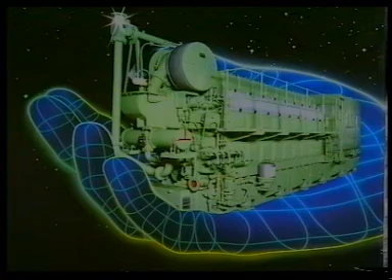This video shows how to dismount and mount the cylinder head, piston and cylinder liner. With regard to overhauling of the components, please refer to the relevant instruction book or the overhaul video.

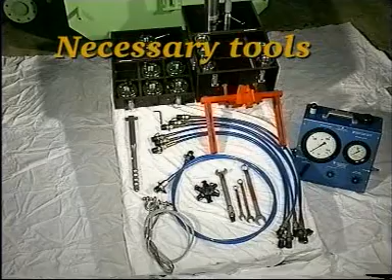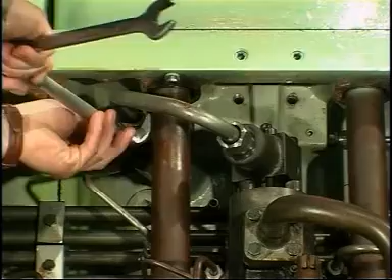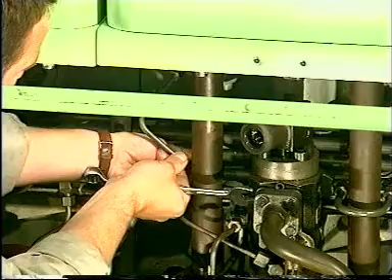Remove the rocker arm top cover and the covers giving access to the injection pump. Disconnect the fuel oil high pressure pipe. Disconnect the rocker arm lubricating pipes. Loosen and remove the cooling water outlet pipe.

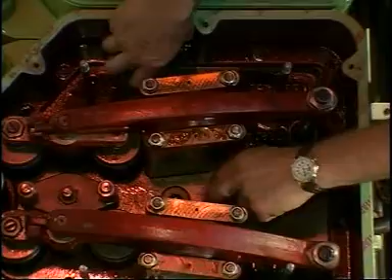Remove the exhaust pipe flange screws. Remove the protective caps from the cylinder head studs. Clean the threads and grease with Molykote or a similar product. Mount the extension tools and grease the threads.

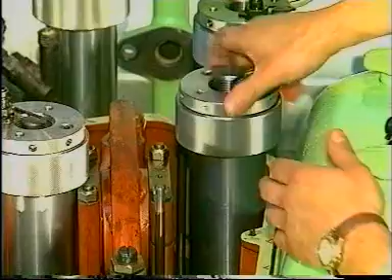Mount the spacers in such a way that the Tommy bar can be applied through the slots when the nuts are to be loosened. Mount the hydraulic jacks and screw them firmly against the spacers. Make sure that the parts engage correctly. Unscrew the jacks 3/4 to 1 revolution to provide for the contraction of the studs.

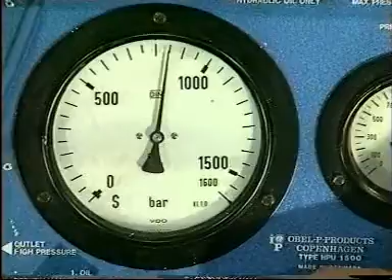Connect the snap-on couplings to the distributor and to the jacks, and connect the high pressure pump to the distributor. Vent the system if necessary and increase the oil pressure to the prescribed value. Unscrew the nuts with the Tommy bar. Be careful not to screw the nuts up against the jack. Relieve the system of pressure and screw down the nuts so that the oil returns to the pump. Disconnect the hydraulic pump and remove the hydraulic tools.

Remove the cylinder head nuts. Place the lifting tool on the cylinder head and fasten it by means of the 2 screws. Attach the hook to the lifting tool and lift the cylinder head away.

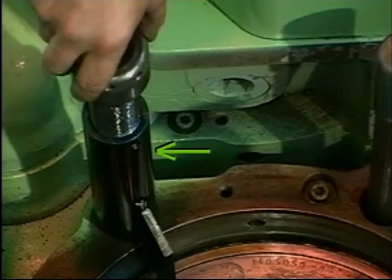Turn the piston downwards and clean the upper part of the liner. Place a used piston ring on the top of the piston. Mount the tool for holding down the cylinder liner. Turn the piston upwards and push the flame ring out of the liner. Remove the flame ring and the piston ring. Clean the upper part of the liner.

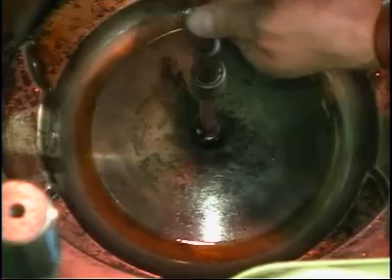Turn the crank throw concerned to a position approximately 50 degrees before top dead center. Clean the threaded hole in the top of the piston. Mount the tool for holding down the cylinder liner. Mount the lifting eye bolt, hook on a tackle and haul tight. Remove the cover giving access to the crankcase compartment. The big end bearing may be designed for mechanical assembling or hydraulic assembling.

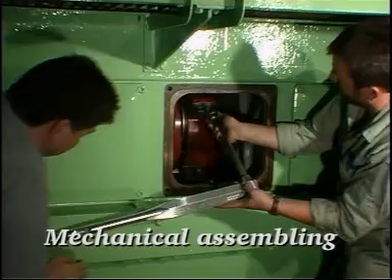Loosen the connecting rod screws and remove one of the uppermost screws. Mount the guide pin and insert a screwdriver or the like into the guide pin hole. Unscrew the remaining screws and remove the bearing cap. Remove the guide pin.

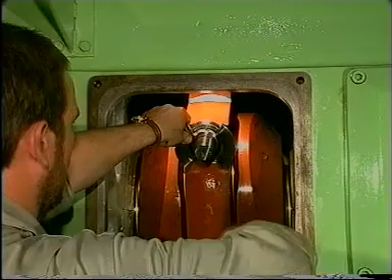Clean the threads and grease with Molykote or a similar product. Mount the spacer rings and the hydraulic jacks, positioning the slots of the spacer rings so that the Tommy bar can be applied through them when the nuts are to be loosened. Make sure that the parts engage correctly. Unscrew the jacks 3/4 to 1 revolution to allow for the contraction of the studs. Vent the system if necessary and increase the oil pressure to the prescribed value.

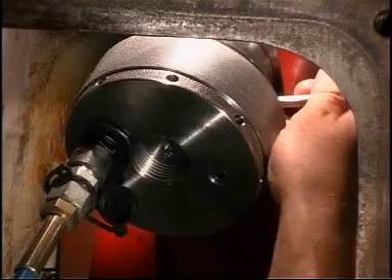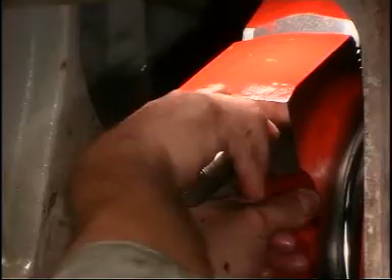Unscrew the nuts with the Tommy bar. Relieve the system of pressure and remove the hydraulic tools. Unscrew the nuts and remove the bearing cap. Finally, unscrew the studs.

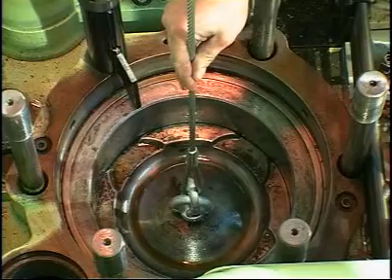Push the connecting rod clear of the crank journal and lift the piston and connecting rod. Remove the upper big end bearing shell and lift the piston out of the engine. Land the piston on wooden planks and mount the bearing cap so as to protect the joint faces.

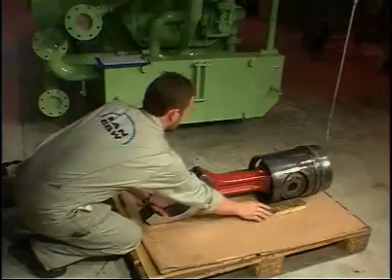Insert wooden wedges and lift the piston. Remove the Seeger circlip and piston pin and lift away the connecting rod.

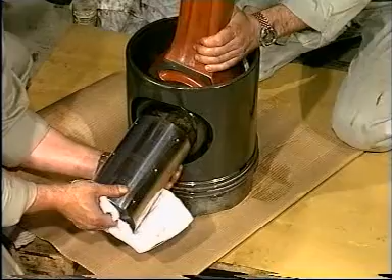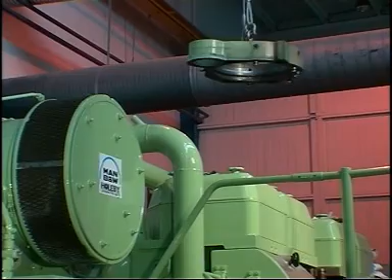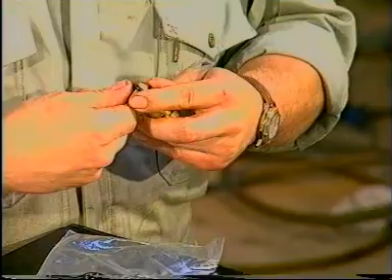Remove the tool which holds down the cylinder liner. Loosen and remove the screws which secure the cooling jacket to the engine frame. Lift the cooling jacket off the engine and remove the cooling water connections. Discard the old O-rings and mount new ones. Clean the sealing surfaces with emery cloth and cleaning fluid. Discard the O-rings from the scavenge air sleeve and mount new ones.

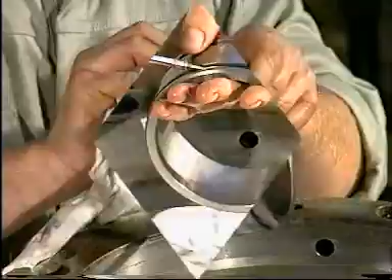Remove and discard the O-ring on the underside of the cooling jacket. Lower the lifting tool into the cylinder liner. To ensure the correct remounting, make sure that matching marks have been made on the liner and on the frame. When the lower crosspiece is in place, tighten the tool until it abuts against the cylinder liner.

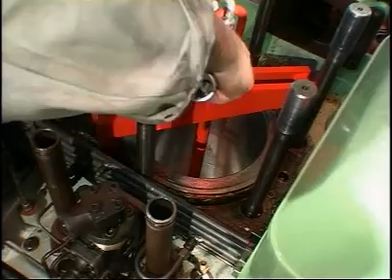It is recommended that the crankshaft be protected by plastic, as 2 to 3 litres of water will drain off when the first liner is removed. Lift the cylinder liner out of the engine. Use a chisel and a hammer to loosen the sealing ring.

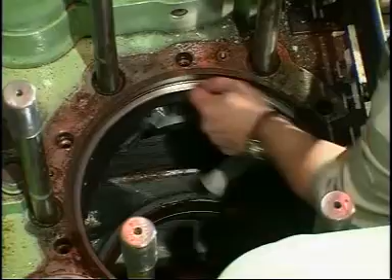Clean the sealing surfaces with emery cloth and cleaning fluid. Clean and check the condition of the wear ring in the bottom of the frame. If necessary, exchange the wear ring. Finally, remount the sealing ring between liner and frame, or, if necessary, mount a new ring.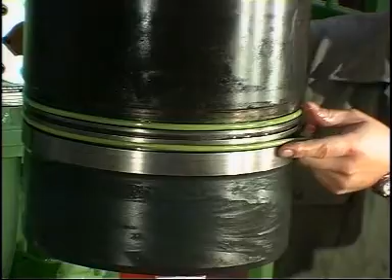Mount the lifting tool in the new or overhauled cylinder liner. Lift the liner and clean the O-ring grooves. Lubricate the new O-rings with oil and mount them in the grooves of the liner. Lower the liner carefully into the engine frame.

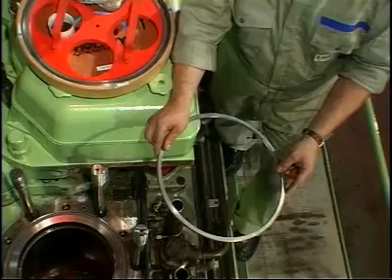When the first O-ring touches the sealing face, align the liner so that the scratch mark on the liner flange is in line with the scratch mark on the frame. When the liner has been lowered fully home into the frame, remove the lifting tool. Fit a new sealing ring in the groove on the top of the liner. Measure and record the distance y.

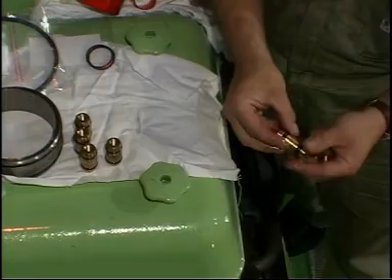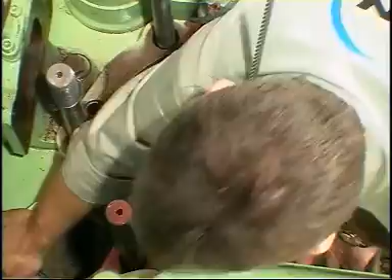Lubricate the cooling water connections with oil and mount them in the engine frame. Mount a new O-ring in the groove on the underside of the cooling jacket. Mount the cooling jacket and tighten it to the cylinder frame by means of the Allen screws. Mount new O-rings on the protecting tubes for the push rods.

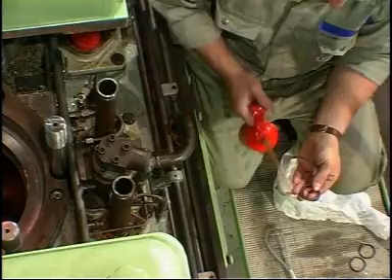Lubricate the scavenge air sleeve with oil and mount it in the cooling jacket. Finally, mount the push rods. Place the piston upside down and lower the connecting rod into the piston. Make sure that the ST marking on the piston crown points in the same direction as the bearing cap.

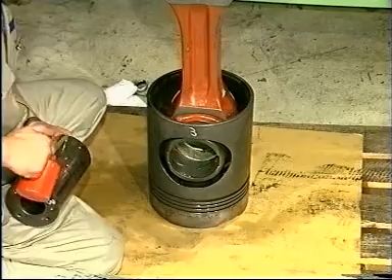Lubricate the piston, connecting rod and piston pin with oil and insert the piston pin. Mount the Seeger circlip and ensure that it engages correctly in the groove. Insert wooden wedges, tilt the piston and mount the lifting eye bolt.

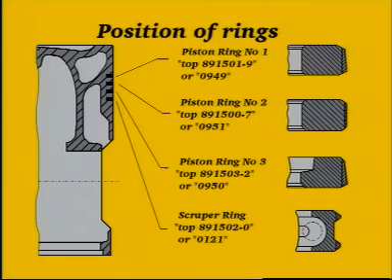Always use new piston rings and a new scraper ring. Fit the rings in accordance with the markings shown on this sketch. Assemble the coil spring in the lowermost groove. Assemble all rings so that the numbers face upwards. Fit the scraper ring so that the ring joint and spring joint are offset approximately 180 degrees.

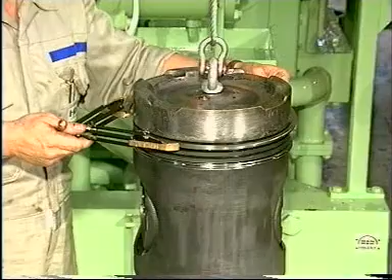Use the special piston ring opener when fitting the piston rings. The piston rings may be permanently distorted if the ring opener is not used. Check that the rings can move freely in the grooves. Ascertain correct assembling by checking that the face of the rings can be pressed inside the groove edge.

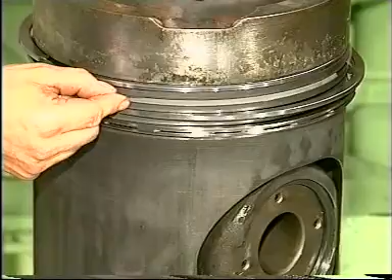To confirm the vertical clearance, insert a feeler gauge of adequate thickness and move it all the way round. Finally, offset all the ring joints approximately 180 degrees to prevent gas leakage. Remove the bearing cap from the connecting rod. Mount the guide ring on top of the cylinder liner.

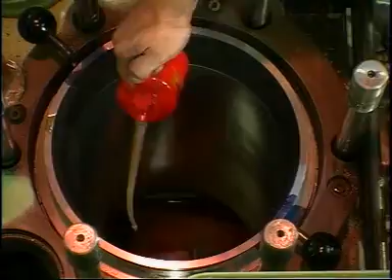The guide ring for liners with a flame ring is provided with a protrusion. Lubricate the guide ring with oil in order to minimize the friction. Clean the connecting rod and joint faces and mount the upper bearing shell. The correct free spread will ensure that the shell will remain in position.

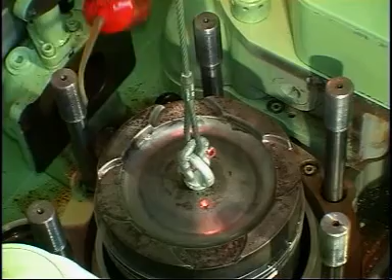Lubricate the piston, piston rings and scraper rings, and lower the assembly into the cylinder liner. Make sure that the crank throw is in a position of approximately 50 degrees before top dead center. Clean and lubricate the crank journal with oil. Land the connecting rod on the crank journal, taking care not to damage the journal and bearing shell.

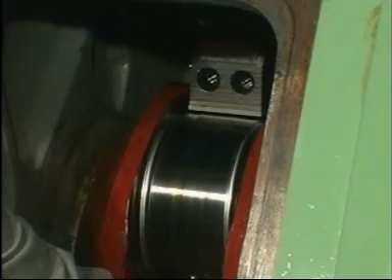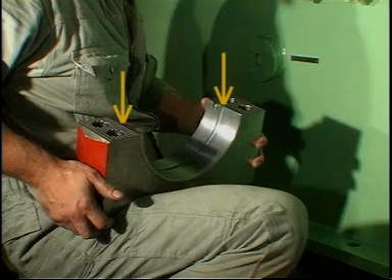The big end bearing may be designed for mechanical or hydraulic assembling. Insert the guide pin. Mount the bearing shell in the bearing cap and coat the joint faces with Molykote or a similar product. Mount the bearing cap and insert a screwdriver in the guide pin hole. Lubricate and mount the screws and remove the lifting tool from the piston.

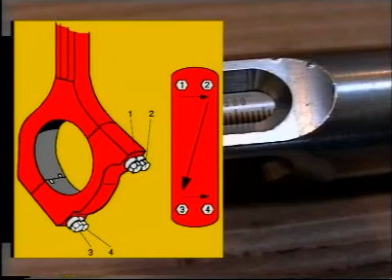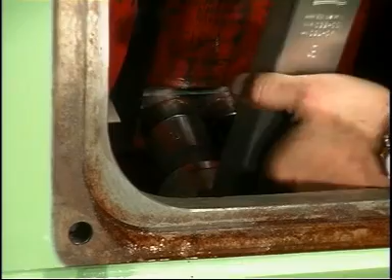Adjust the torque spanner to 400 Newton meters. Using an initial torque of 400 Newton meters, tighten the screws in the tightening sequence shown. Retighten the screws in the same tightening sequence, still using a torque of 400 Newton meters.

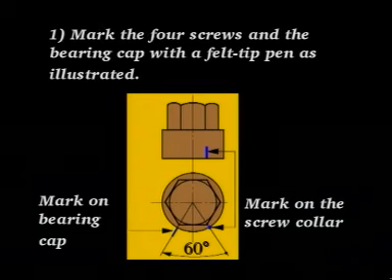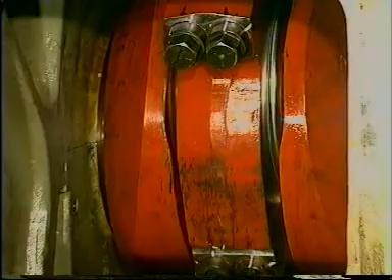Mark the 4 screws and the bearing cap with a felt-tipped pen. Tighten the screws in the same tightening sequence through a 60-degree angle until the marks on the collars and the connecting rod coincide in the radial direction.

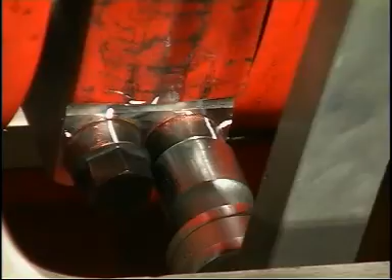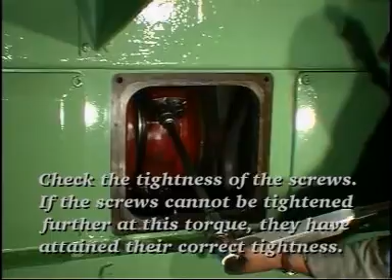Adjust the torque spanner to 700 Newton meters. Check the tightness of the screws. If the screws cannot be tightened further at this torque, they have attained their correct tightness. Check that the bearing cap can move easily on the journal.

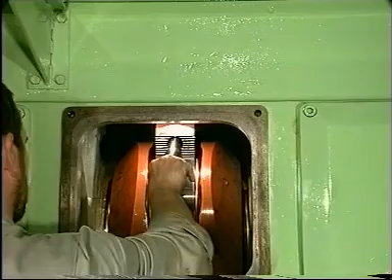Lubricate and mount the studs on the connecting rod. Mount the bearing shell in the bearing cap and coat the joint faces with Molykote or a similar product. Mount the bearing cap and lubricate the threads with Molykote or a similar product. Screw the nuts onto the studs and tighten them with a Tommy bar. Remove the lifting tool from the piston.

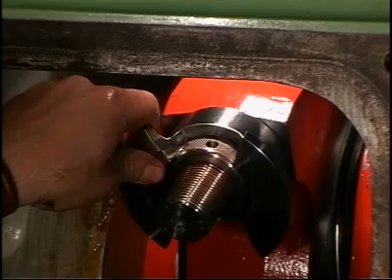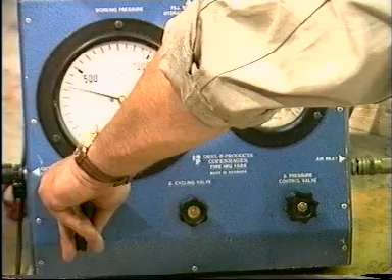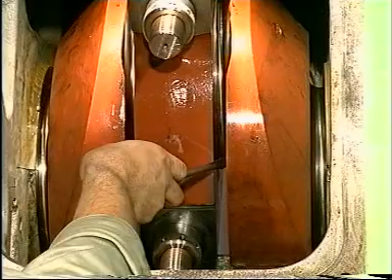Mount the hydraulic tools. Make sure that the parts are correctly engaged. Vent the system if necessary and increase the oil pressure to the prescribed value. Tighten the nuts with a Tommy bar. Relieve the system of pressure, repressurize, retighten the nuts, and repeat this process until it is ensured that the nuts cannot be tightened further. Remove the hydraulic tools. Check that the bearing cap can move easily on the journal.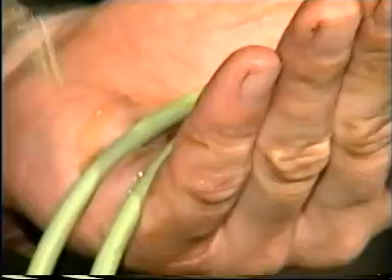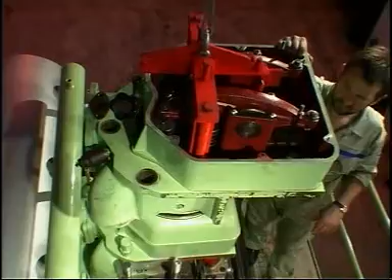Mount a new flame ring in the top of the cylinder liner. Lubricate new O-rings with oil and mount them in the grooves in the lower part of the cylinder head. Make sure that the sealing surfaces of the cylinder head are clean and undamaged. Also check that the sealing surfaces of the liner are clean and undamaged. Measure and record distance Z. To ensure that the sealing between the cylinder head and the liner is correct, Y minus Z must be more than 0.5 mm.

Land the cylinder head on the liner and remove the lifting tool. Check all contact faces of the cylinder head and nuts, including threads, and make sure that they are plain and absolutely free of foreign particles. Coat the threads and the contact faces with Molykote or a similar product and screw the cylinder head nuts onto the studs. Tighten the nuts with a Tommy bar. Make sure that the nuts bear on the entire circumference of the contact surface. Knock a wedge in between the cylinder head and exhaust pipe and insert a new gasket and the screws, but do not tighten the screws as yet.

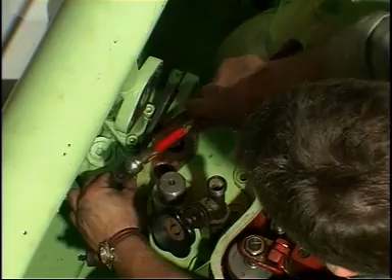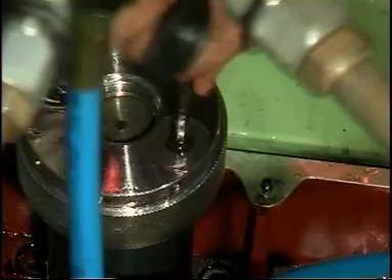Mount the extension tools, spacers and hydraulic jacks on the cylinder head studs. Make sure that the parts are correctly engaged and ensure that the Tommy bar can be applied through the slots of the spacers. Connect the hydraulic high pressure pump and vent the system if necessary. Tighten the venting screws when oil without air bubbles is emitted. Increase the pressure to the prescribed value and tighten the nuts with a Tommy bar. Check with a feeler gauge inserted in the recess of the spacer that the nuts bear against the contact faces. Relieve the system of pressure.

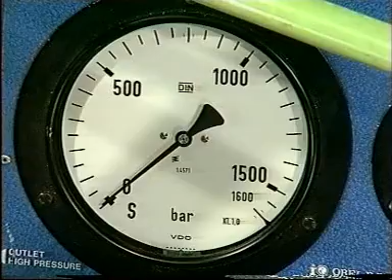Screw the nuts down so that oil returns to the pump and remove the hydraulic tools. Mount the protecting caps. Insert and tighten the remaining screws of the exhaust pipe and mount the cooling water connection.

Turn the piston to top dead center and check that the rollers rest on the circular part of the cams, in which position both the inlet and exhaust valves are closed. Loosen the adjustment screws on the rocker arm and on the valve bridge of the inlet valve. Insert the 0.4 mm feeler gauge marked correct between the spindle and valve bridge nearest the rocker arm bracket. Tighten the adjustment screw until the correct clearance has been obtained and then tighten the lock nut.

Leave the feeler gauge in position and insert another 0.4 mm feeler gauge between the second spindle and valve bridge. Tighten the adjustment screw until the correct clearance has been obtained and tighten the lock nut. Check simultaneously that the clearance is correct at both valve spindles. Finally, make sure that the 0.5 mm feeler gauges marked incorrect cannot be inserted between the spindles and bridge. Repeat the procedure for the exhaust valve spindles, this time using the 0.9 mm feeler gauges marked correct and the 1.0 mm feeler gauges marked incorrect.

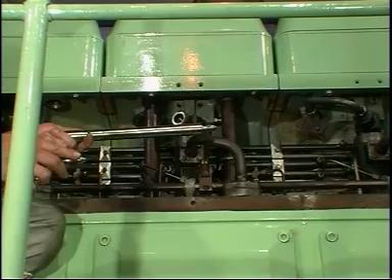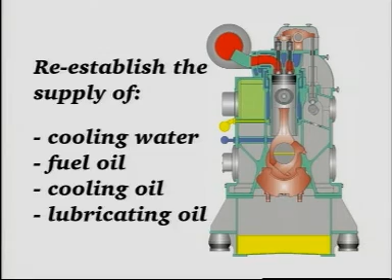Lubricate the fuel oil high pressure pipe with Molykote or a similar product. Fit the pipe and tighten the union nut to the torque stated in the instruction book under Data for Torque Moment. Fit the lube oil pipes. Re-establish the supply of cooling water, fuel oil, cooling oil and lubricating oil. Prior to startup, check for cooling water and oil leakages and check the oil flow.

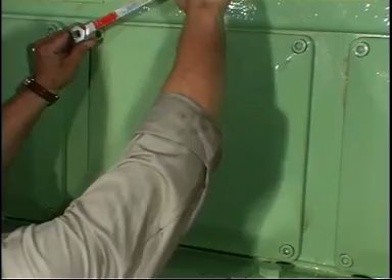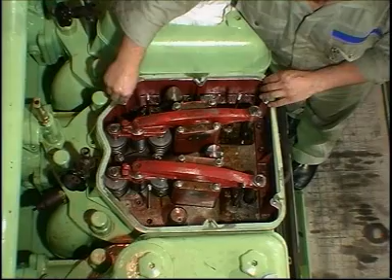After startup, check for leakages and check the oil flow. Fit a new gasket and mount the cover for the rocker arms. Finally, mount the front covers for the fuel pumps.